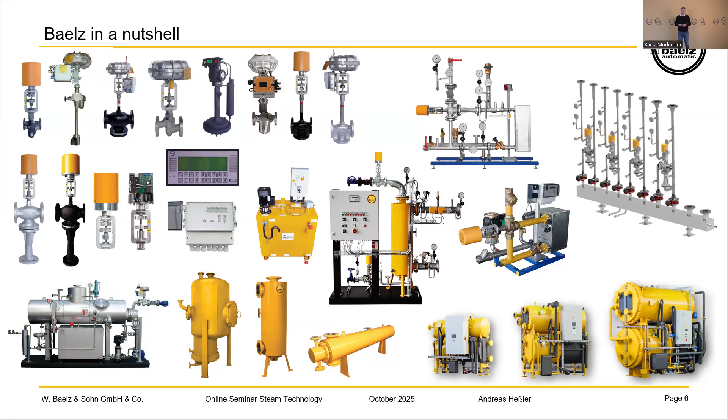Without showing the whole complete portfolio, just to give you an overview of what we are capable of doing. We are manufacturers of control valves, as you see in the top left corner.

Then the system solutions, especially for heat transfer, steam terminals, where you transform steam to condensate and use the energy of the steam to heat your process or heating purpose. We have steam generators and steam terminals, where we use thermal oil or also steam to produce clean steam, for example.

Then we have system solutions for heating distributions, where we produce whole systems of heating distributors with control valves, with injection valves. And as I mentioned, the absorption chillers in three different sizes: the Bee, the Bumblebee, and the Hornet in the bottom right corner.

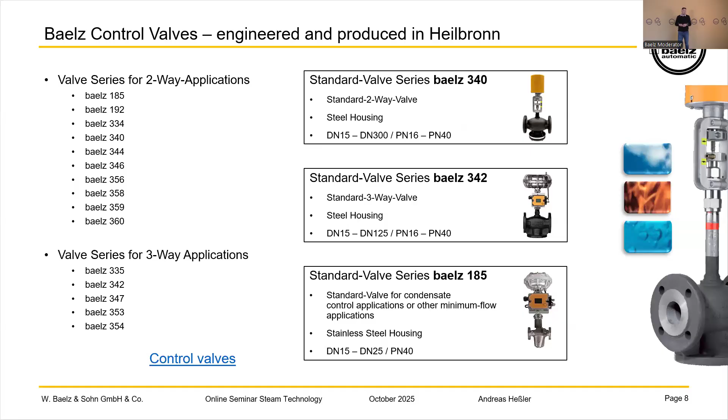And as I said, all these components add up to system solutions, for example for heat transfer, for steam, for thermal oil, for any other heat transfer application.

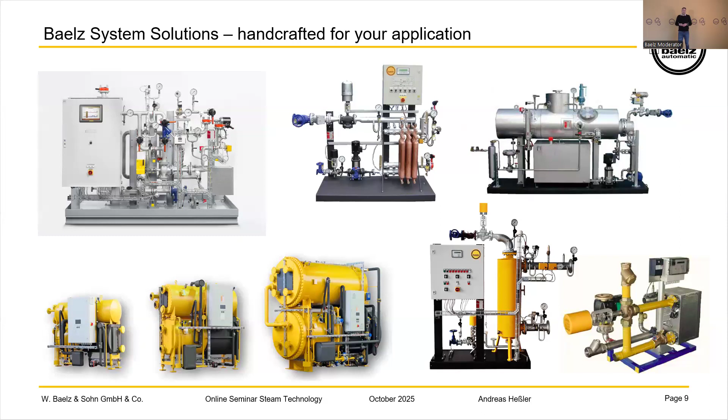If you would like to see some of these system solutions or products live, you're always welcome to Heilbronn, to our headquarters. Just step by, give us a quick call up front or write us an email, and we are happy to welcome you in our showroom, give you a little tour, show you our system solutions for steam, thermal oil, or any other heating or heat transfer application.

Just reach out to us if there's maybe a day that you already know where you will be in the Heilbronn area, then step by and we can give you a quick tour.

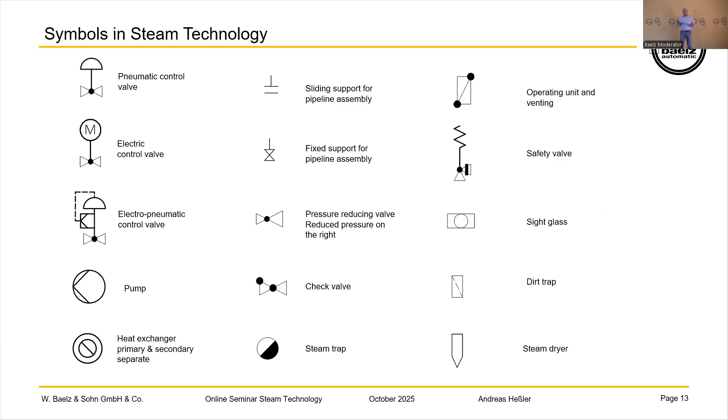The first slide, what I tried to show you, is just a quick overview about the symbols in steam technology that are used most of the time, like check valves, pumps, and so on. It's just for your information, you can read it later when you have the presentation.

Let's go first to the enthalpy of water and steam, and let's explain how this works together. First, when you have 1 kilogram of water and you heat it up from 0 to 100 degrees, you have energy going in there of around 417.5 kilojoules. And when you heat up this water more and more in that atmosphere, you will evaporate the water, and you have another energy you would put into the steam of around 2,258 kilojoules.

If we look at these two pictures, the left one, when we heat up the water to 100 degrees, we call it sensible heat. And if you evaporate the steam, we call this latent heat. Together, when we heat up from 0 degrees to 100 degrees and then evaporate, we have around 2,675 kilojoules.

Yeah, it's just... Let's go quick. That was quick, I know. Let me just interrupt you for a second because I think this is a very central slide, a very important point. If you could just go back to the slide.

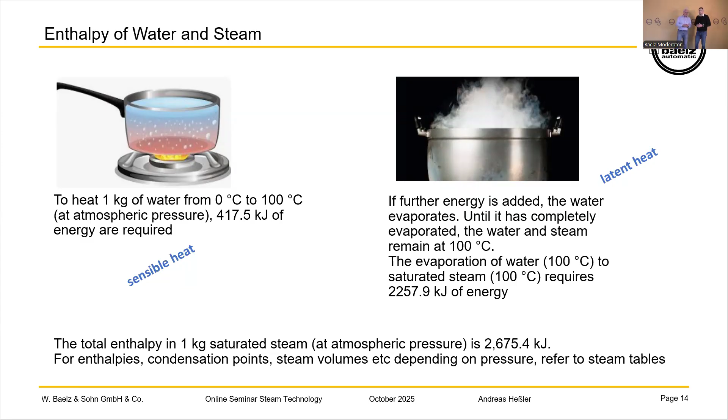Let's see the next slide and have a look at saturated steam and different kinds of pressure. When you have 1 bar saturated steam, you have roughly, together with heating up to 100 degrees and evaporating, about 2,680 kilojoules. When you have 10 bars, it's much more, but the increase of energy is mostly in heating up the water, because you need more energy to go up to 180 degrees to evaporate the water.

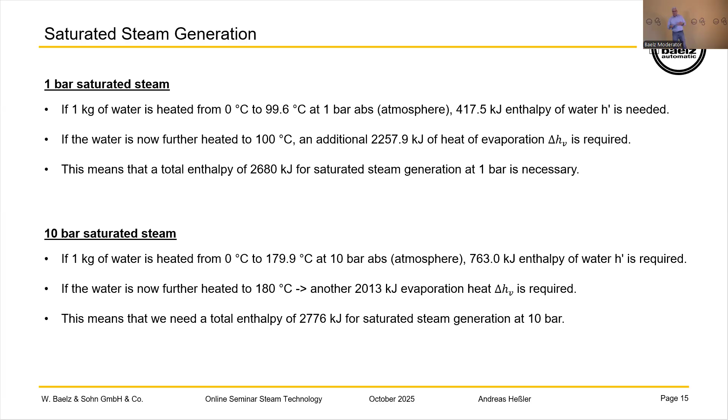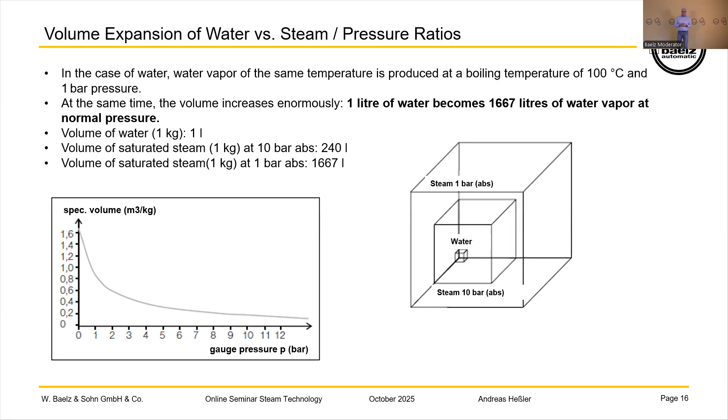We have 3 types of steam. The first one would be saturated steam, meaning it's normally very dry. When you've evaporated the water, you call it saturated steam temperature, and then you're right on the phase change from water to steam.

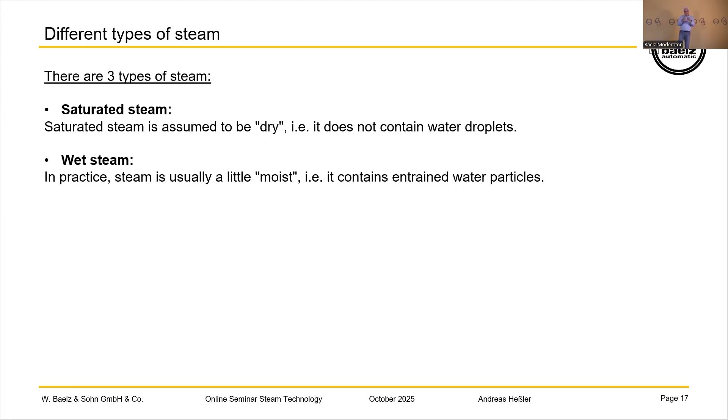The next one would be wet steam. This is the steam you see, for example, when cooking water and you see a fog over the water bubbles. We call that wet steam because it's not dry steam, there's some water in there. It's also at saturated steam temperature, but this steam is wet because there are water droplets in it.

The other one would be superheated steam, meaning you have the steam evaporated and then you give more energy, so it becomes very dry with no water droplets in it -- we call that superheated steam.

No problem, not to interrupt you, but I think it's helpful for our audience. Of course, so forgive me if I interrupt you. You're welcome. You introduced the three types of steam.

Which one do we want for our heat transfer applications? For heat transfer application, normally you need saturated steam temperature, because that's where the steam gives the most energy, to the phase change. When you have superheated steam at higher degrees, you first need a lot of area to cool down the steam to saturation temperature, so you want to have nearly saturated steam temperature. So again, the most energy is transferred by the change of steam getting into water, condensing, and in the other way, the most energy you have to put in is from getting water to steam.

All right, Andreas, thank you. You're welcome.

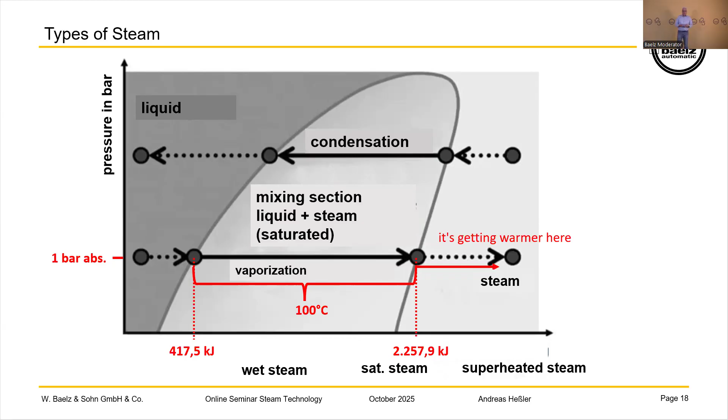Let's say something about steam valves, or let's say steam armatures.

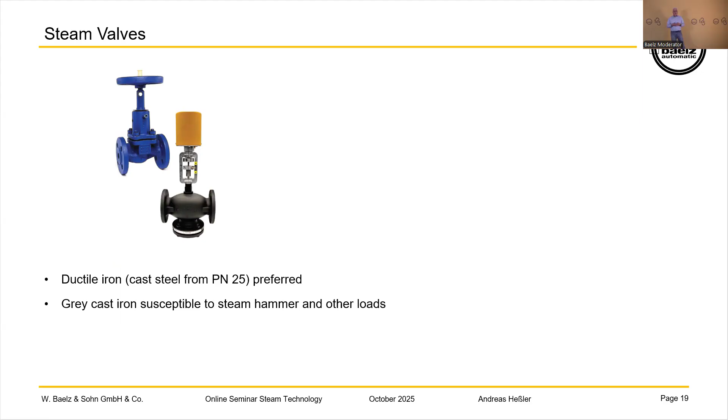For us, it's very important when you use a steam application to use ductile iron or cast steel for the valves, because gray cast iron is very brittle, and brittle means you have a lot of problems when you have some steam pressure drops or something like that. They can break, and they are not as soft as ductile iron or cast steel.

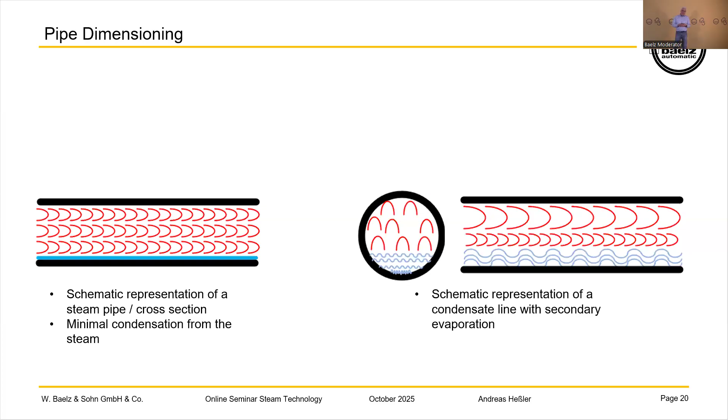You see when we have flashing or a lot of high water influence in there, mostly when you have a pressure reduction of hot steam condensate to a lower pressure, then you have a steam water mixture inside the pipe. So this is much more critical for the steam pipe than the normal condensate.

Velocities in the steam pipe: what we normally prefer for saturated steam, because in saturated steam there could be some water droplets, would be between 20 and 30 meters per second. And if you go much lower on the saturated steam velocity, you have more condensate because you are so slow with the speed. So it would be good to have them between 20 and 30 or 35 meters per second. So try to have this velocity.

For superheated steam, the velocity could be much higher because we have no water in the pipe. So we're going up to 45, sometimes to 50 or 60 meters per second, because you have no issues with water droplets or condensate inside the pipe. So it would be good for the piping.

If you have hot condensate where there could be some steam inside the piping, it would be good to have not more than 0.5 meters per second or 1 meter per second. Don't go higher, because you have some flashing, like in the right pictures. A steam water mixture is not good; the piping would be destroyed.

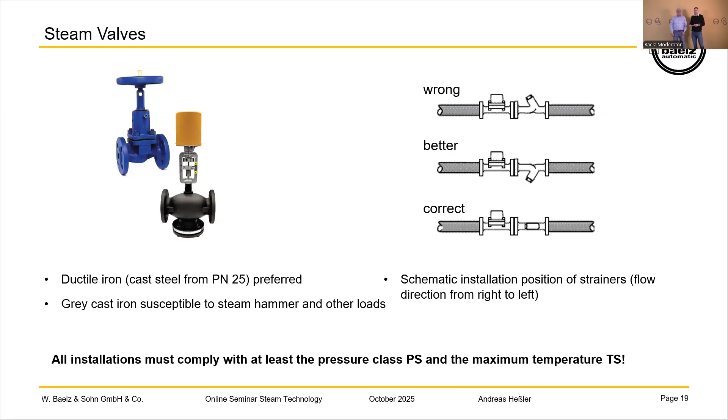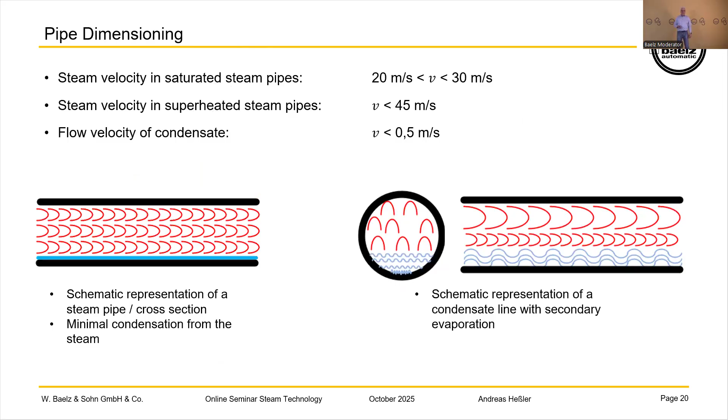So where we are, where we are, yeah. So we were almost finished with them.

Here are some slides. The next 3 slides are just for your information on what you have to check to install steam traps and how to install steam traps. Always have line falling. When you have line falling, the steam trap has to be on the lowest point, of course. The water will go to the lowest point. And the falling should be 1 to 200.

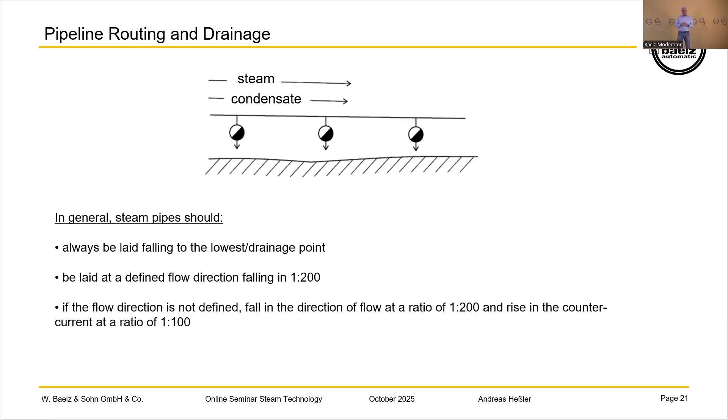And if not, if the flow direction is not defined, you better use it a little bit smaller for mounting the condensate steam traps. Sorry. Note for steam traps, when we have a lot of water inside the steam, I already told you not to have a steam velocity over 20 meters per second.

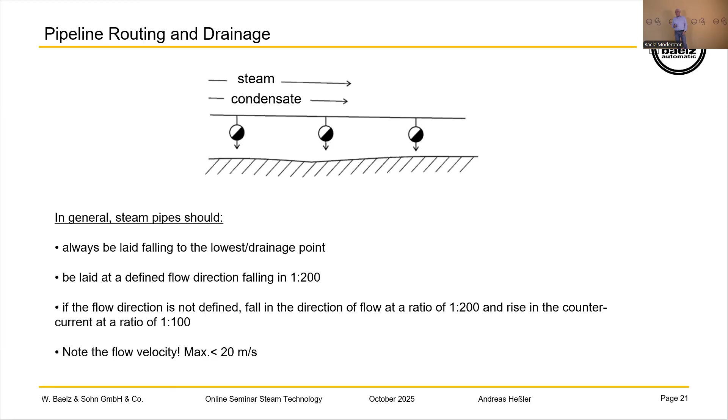I see another question, so I will stay with this slide. No, no, wait a minute. Additional information. Another, give it back. Another information. There was okay. The question was not finished. Understand. Go ahead. Yeah, and we will go back.

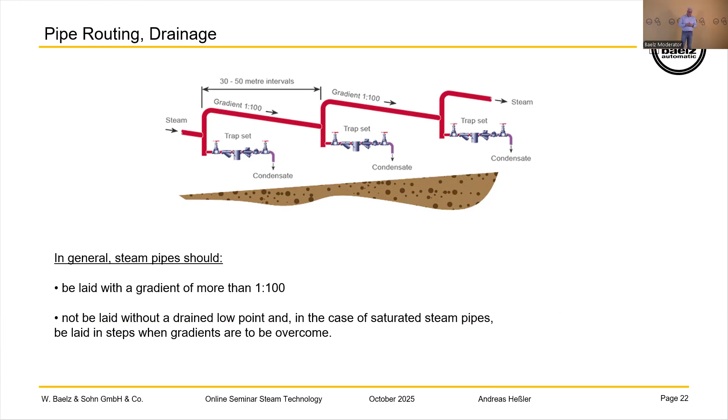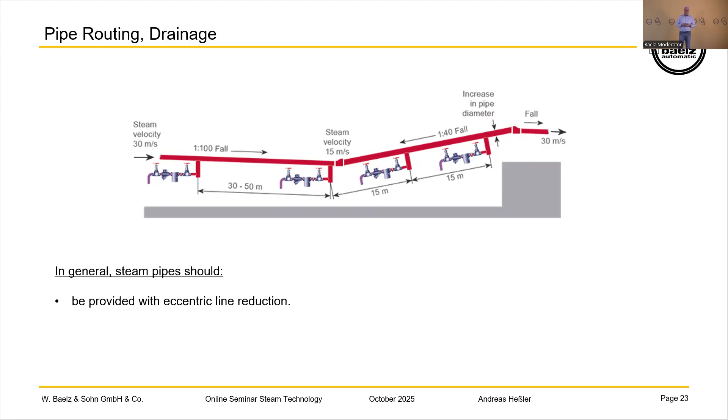If you have a line with more than 1 to 100, the installation should be like shown in the picture, making a lowest point and draining it there. And here I have another picture when we have some ups and downs and how they fall. So it would be good, when you fall down, that the installation of the steam trap would be less than 30 to 50 meters. And also what is very important is to use eccentric line reduction and not concentric.

Yeah, that's what the slide says. You can check it later to have it exactly. It's good information for you.

Another question, you have to go back? Ready or not? Yeah. There was a question about safety valves. What about the PSV relief line velocities? So, I understood the question is about the media velocity after the safety valve, when the safety valve is active.

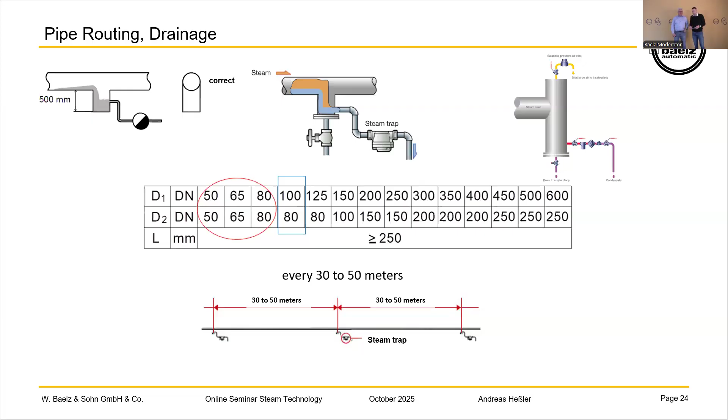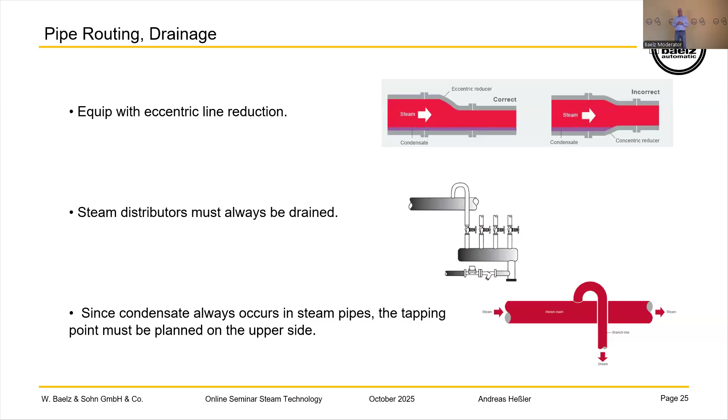Steam distributors must always be drained, that's for sure. And the next one is when you have water inside the steam and you want to tap off steam: the tapping point on the steam pipe always has to be on the top, because then you can be sure that you don't take the water with the steam.

Next question. Oh, that's very interesting. A lot of questions. I'm so bad, or no, I think it's so interesting. It's an interesting topic you're talking about, of course. Yeah. Yes, we appreciate all your questions. Of course, yes. Go ahead with them.

Yes. There was a follow-up question to the 100 meters per second of the safety valve topic. The 100 meters per second at which pressure? At set pressure or atmospheric pressure? Normally the safety valve goes to atmosphere, and that means at atmospheric pressure, what is going out of the safety valve. Yeah, typically the line goes to the side of the building. Yeah, and to a silencer in the normal case.

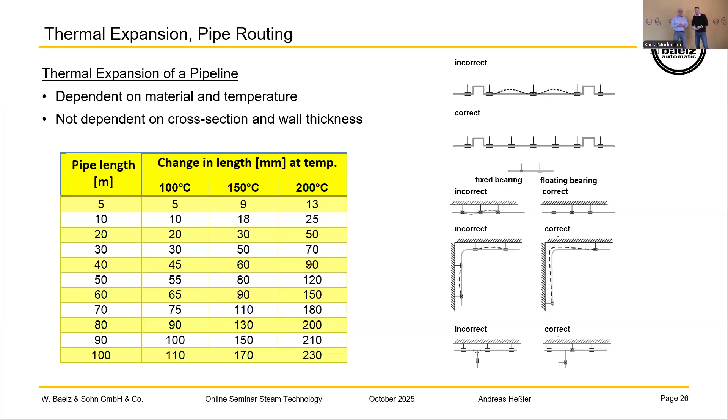Here I made just for you a practical rule of thumb, just an overview for whoever is interested. You can read down a little bit and get some information. That's just some rules to quickly know what is what. And yeah, it's just information, and you can check this out.

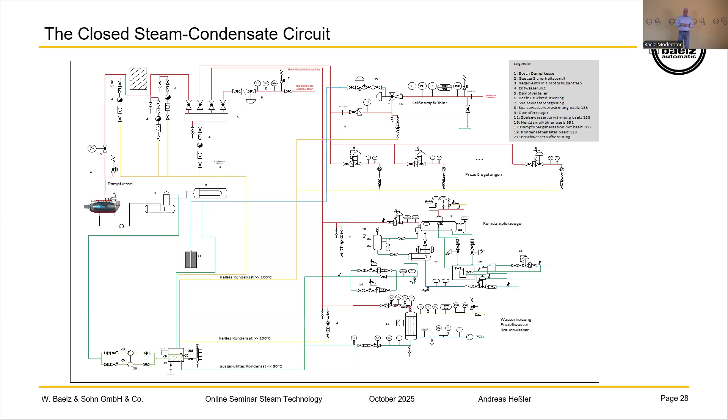On the next one, what we see here is a schematic of a closed steam condensate circuit. On this one I want to show you where we are. I chose this because a closed condensate circuit is very normal for BAELZ. For example, we're starting here with the water heating, process water and raw water heating, using our heat exchangers. The next one would be our clean steam generators used in this circuit.

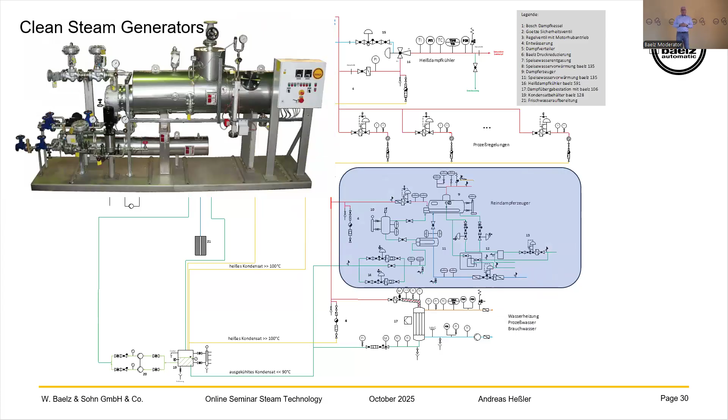And then, of course, you need some control valves in this circuit. We have the regulators for them. We have different kinds of actuators, like Michael already told you. So you can use all of our control valves with the controlling and measuring. The next would be steam conditioning. We have our 591 steam conditioning valve. I will say a little bit more about steam conditioning later on, so you will see more information then.

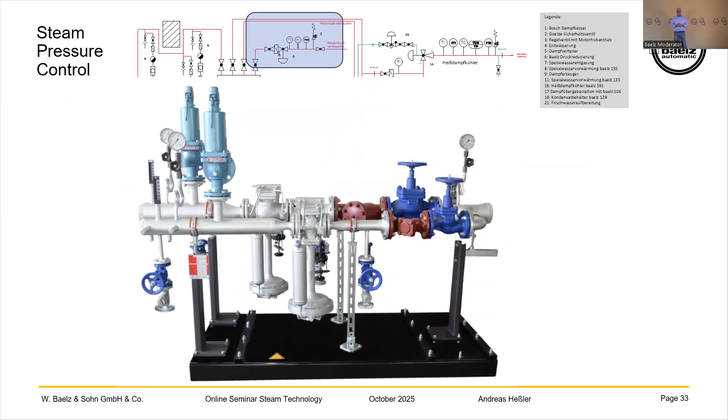And then we have normal steam pressure control, in this case with our self-operating valve. It could also be done with a normal control valve. And for the condensate handling, you need some instruments and systems we can also deliver. You see, we are all around the complete circuit, and when you go out on the steam side and have the water heating, the chiller, the divider, we can deliver all the other parts on this secondary side also.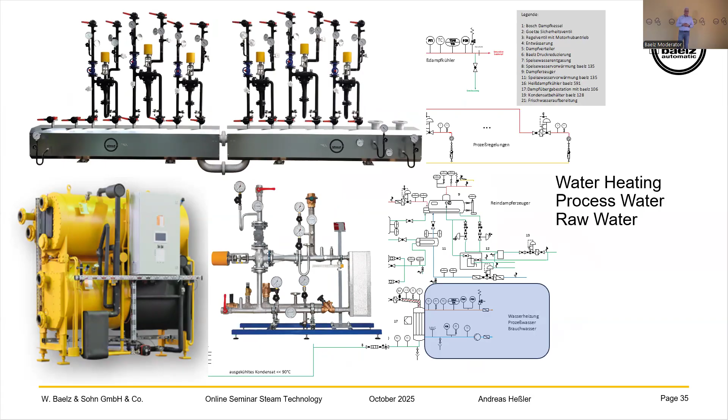Let's say something about steam transfer stations, what kind of design data we need. First we need the use case, what you need it for. Then we need the primary and secondary media, like steam or water. The design temperatures and pressures, the maximum operating temperatures and pressures handled on the heat exchangers, technical connections and conditions, and type and design of the control, meaning whether you want steam side control or condensate control. I will show you the difference now.

On the left picture, you see the steam side control, which means you need a control valve at the steam inlet to control the temperature on the secondary side. And with condensate control, you're not controlling the steam, you're controlling the condensate, where you control the outlet temperature on the secondary side.

Of course, not with a question, but just to make it clear, because I think this is also a very interesting slide that you just showed. The steam side and the condensate side control. So we're making a difference between two types of controlling the power that the steam terminal provides to the secondary side. On the steam side control, we control the amount of steam getting into the heat exchanger by a control valve on the steam side.

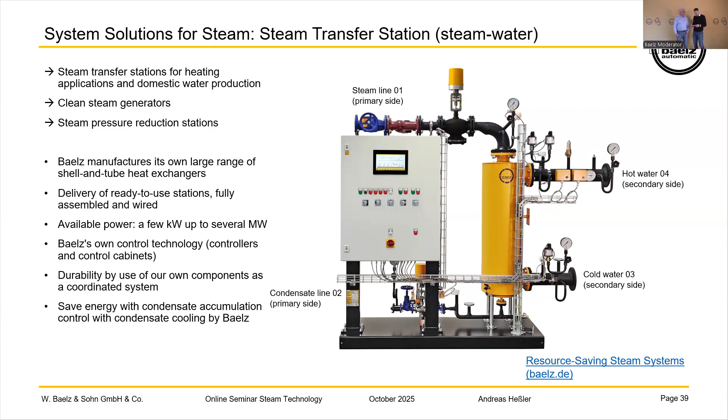You're welcome, Andreas. Here is just a picture of how a compact unit looks. You see the inlet and the outlet connections, just for your information.

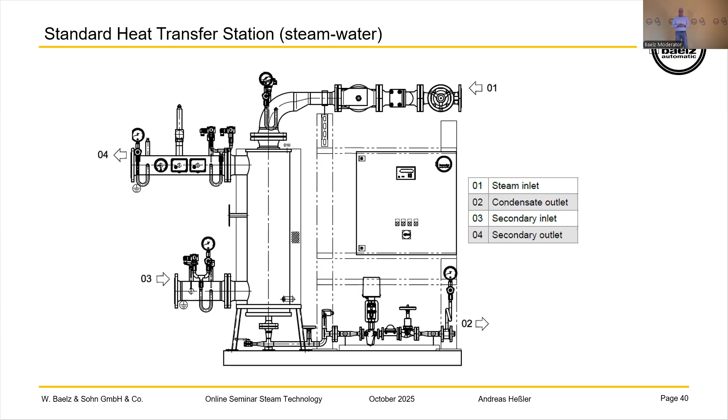The next one would be clean steam generators, where we put in plant steam, thermal oil, hot water or electrical heating, and with the feed water, normally demineralized or clear water, we produce pure steam. This design can be horizontal or vertical, and the output, like the other ones, is from a few kilowatts up to several megawatts, which we can all handle.

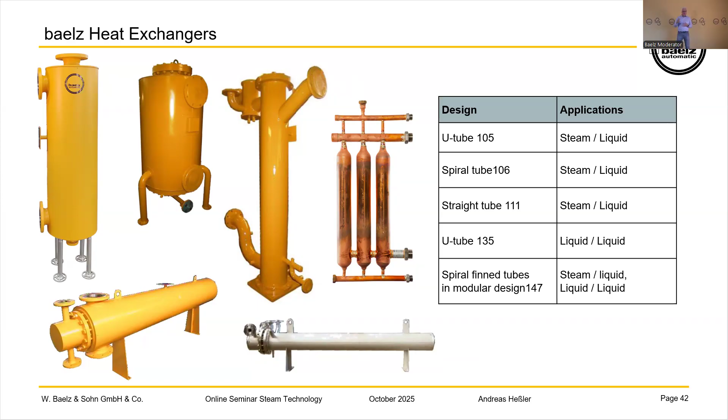Here's a quick overview of our different kinds of heat exchangers and their applications. Steam-liquid is the 105, and so on. I will now say something about the different heat exchangers. We will start with the 105. It's a horizontal heat exchanger for steam side control, vertical for condensate build-up, controlling T2 constant, individual designs possible, large and vertical and so on. The material is normal carbon steel. The tubes are made of copper.

Now I get it from the side, copper in English. Normal steel or stainless steel. We normally use as a standard the tubes with stainless steel. That's for all our heat exchangers because it's the best solution with costs and the heat exchanging. We can build this also in a full design of stainless steel. The tubes are from 10 to 12 and a little bit bigger, with different kinds of wall thickness.

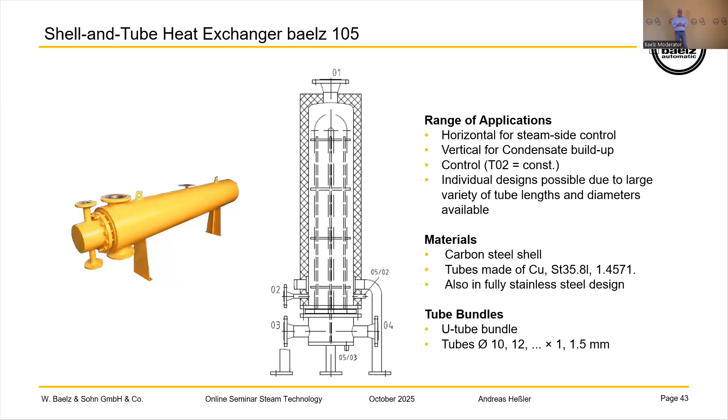Go ahead. Okay. The next one would be 106. Pretty similar to the 105, heating liquids, steam with large output range. We have accumulation from 0 to 100%, heating surfaces from 0.5 to 150 square meters. Sorry. Very compact design. The materials are the same as the 105. I already explained it to you. The tube bundle is a spiral tube bundle, made with a diameter of 10 millimeters.

The next one would be our 111. It's a version for heating water, handling process water, and condensate in upright position versions, individual design possible for large, and different kinds of lengths can be available. The materials are pretty similar to all the others. We can do this also in a stainless steel finishing. The bundles are also like the other ones, starting from 10 to 12 to a little bit bigger.

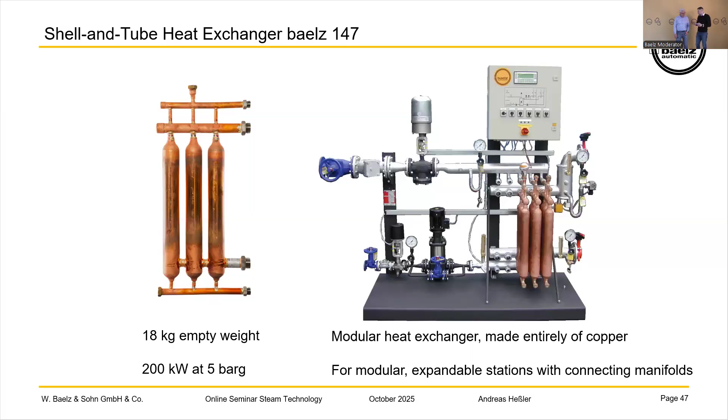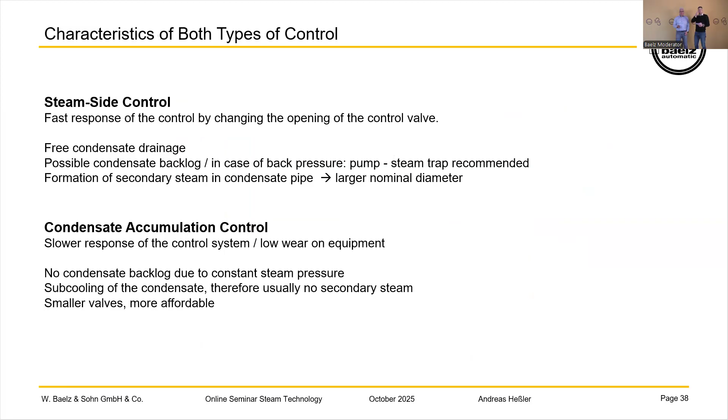Yes. Another question that has to do with the condensate side control. Maybe you go a few slides back if that's not too complicated, so that we see it here, for example. Yeah, this one would be perfect. The question is, is it best practice to install a steam trap in series with the control valve? No. It isn't? No, it's not possible.

When you're mounting a steam trap, you see on the left side, then you make a steam side control. Because when you're using a steam trap, you always have no condensate inside the heat exchanger. So you're not controlling anything. It means you always have 100% power of the heat exchanger, and it simply is not necessary. When you have a control valve on your condensate side control, there will always be only condensate. There's no pressure because there's a layer where there's the difference, the Übergang.

In English? Transition. The transition. Yeah, good. Thank you. Thanks from the technical boys here in the background.

Yeah, there's the transition from steam to condensate, and there will be no steam in the condensate line at the condensate side control. No, it's not needed. And also we have some temperature sensors to check the temperature of the condensate to say, oh no, the temperature is too high, we have some steam. So there is no issue. All right. Thank you.

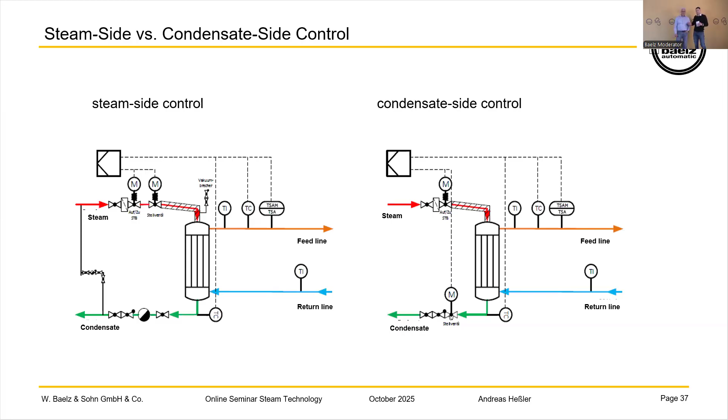Go ahead. Go forward. A few slides forward. Where we are.

Condensate handling. We have a compact unit for condensate handling in different kinds of sizes. The next one, which is a very important theme, is when you have hot condensate and you want to put it in a cold condensate, meaning hot condensate with maybe also a little bit of steam inside.

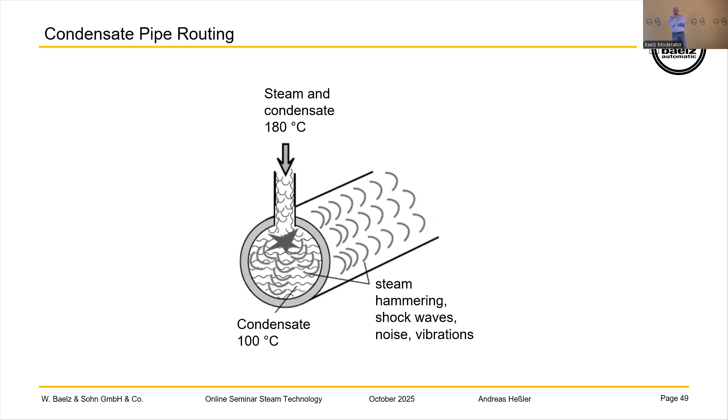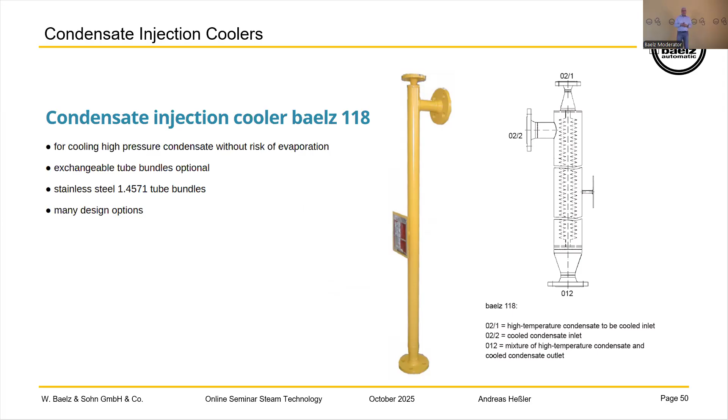That's very critical because you have hammering, shock waves, noise and vibrations. For this solution, we have our condensate injection cooler BAELZ 118. As you will see on the next slide, it's much better. The hot steam comes from the right side inside the pipe, almost like a heat exchanger with open pipes. The hot steam condensate goes into the pipes and cools down by the cold condensate, while the cold condensate heats up. So the temperature difference isn't so big. You get a mixture of hot and cold condensate without hammering, without noise. It's a very good solution when you have to put hot condensate into cold condensate.

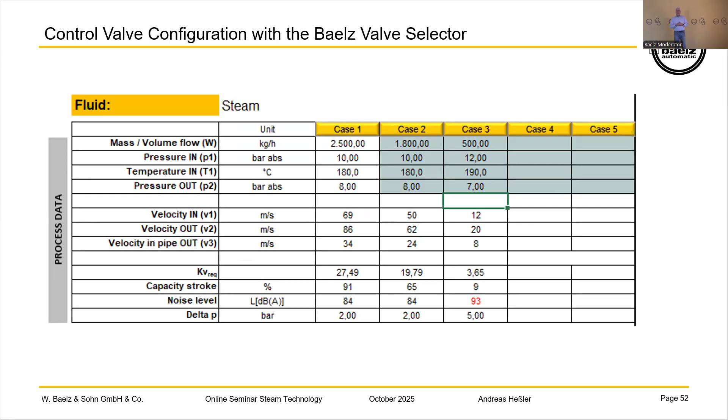Let's say something about the control valve configuration. For this we have our BAELZ valve selector, where we can choose the correct KVS values and the correct size with the velocities, and offer that to you.

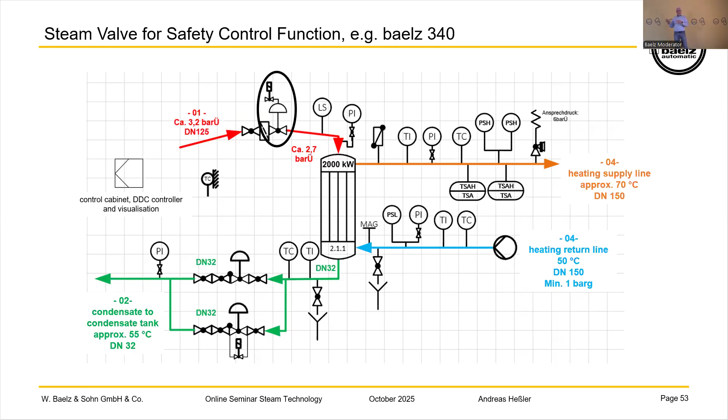Here we have a steam valve for safety function. You see on top, when we use a steam valve for safety function, it means quick close on over temperature or over pressure on the secondary side. We can use our valve 340. We have this kind of valve, as Michael already said, in standard two-way control valves with different sizes from DN15 to DN300, different pressures. We can do it in cast iron, ductile iron, or stainless steel with balanced plugs for smaller actuators. So it's possible in different kinds of applications or versions.

The next one would be- sorry to interrupt, Andreas. Going back one slide, just to make clear so there's no confusion about the control valve shown here: you have a three-way valve shown here for the two-way version, the BAELZ 340, as it's used as a safety valve or safety control valve. On a steam terminal there would be a blind flange on the third way. So that's the difference between the two-way and three-way valve. They have the same housing, which makes more standardization, but you just use a blind flange to close the third way. You can also use it as a mixing valve, with or without the blind flange.

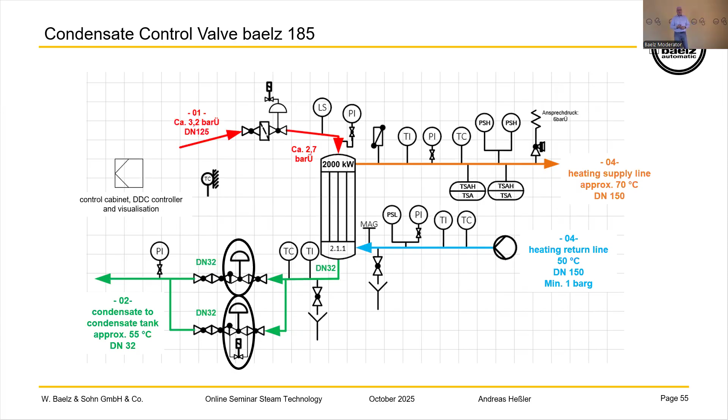Let's go now to condensate control valves. This is normally our DN15 valve from our 185 valve line. If the size- because I'll show you on the next page- we have the 185, a compact design with small KVS values, as Michael said. We can do some custom valve plugs. This has a stainless steel body and is only available in DN15, PN16 to PN40. It's necessary when we have more condensate and more velocity inside the condensate on the heat exchanger than when using our control valve 340. It's not limited; we have some special applications. We can mount strainers and shut-off valves inside the 185 valve. And if we put our element, the 206R, on it, we can use this also as a self-operating control valve.

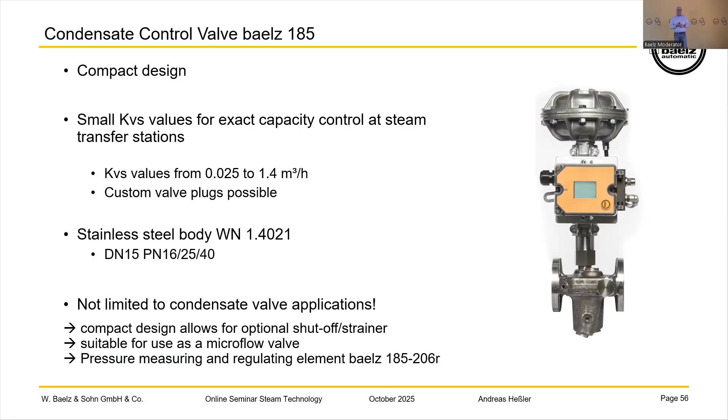Good. Coming from the audience has to do with the steam valve, the 340, when we use it for condensate side control. How would the steam valve ensure the safety function?

Normally with springs. If you're using a pneumatic actuator, it's very simple because in the pneumatic diaphragm actuator you have normally springs on it, and when there's a fail of the air, the springs will close it, or you put it on the underside. You can open the valve also, but in a safety valve you want to close it. So this safety function is already included.

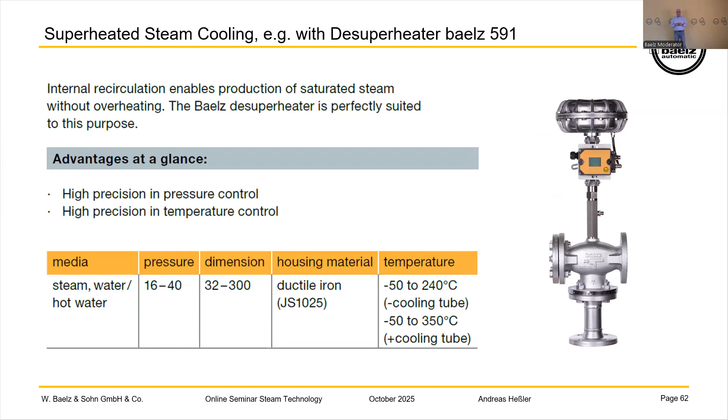Here's just a quick overview of what kind of sizes and how we do it in the normal case.

Another solution from our side about steam water application is our thermocompressor, BAELZ 590, used for recirculation. Like the word already says, recirculation - we have one circle where we can increase the outlet pressure, or the pressure we have after the condensate flashing.

And another one, when we have an open steam vessel, we have some other condensate coming in to increase the flash steam to a higher pressure level.

The flash steam will be increased with the motive steam to a middle pressure steam, and this can be used for our heat exchanger. So we really use the heat that you're normally losing over the flashing of the steam, which normally goes over the roof.

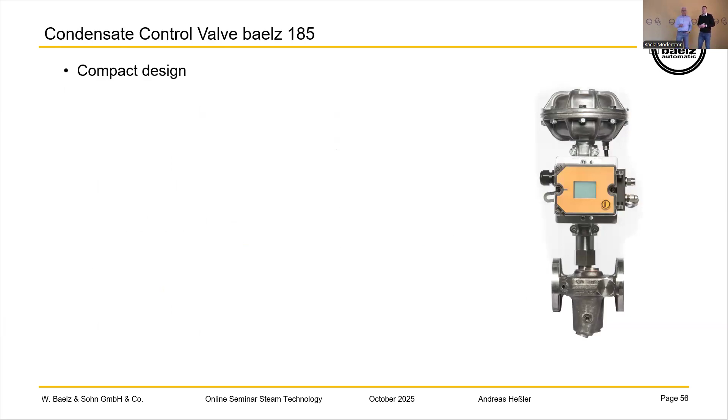I think we'd take this question and give some time to get a little more into detail. One thing that comes to mind to avoid water and steam hammering, meaning condensate and steam coming together, is to use steam traps, as we already discussed with the 118.

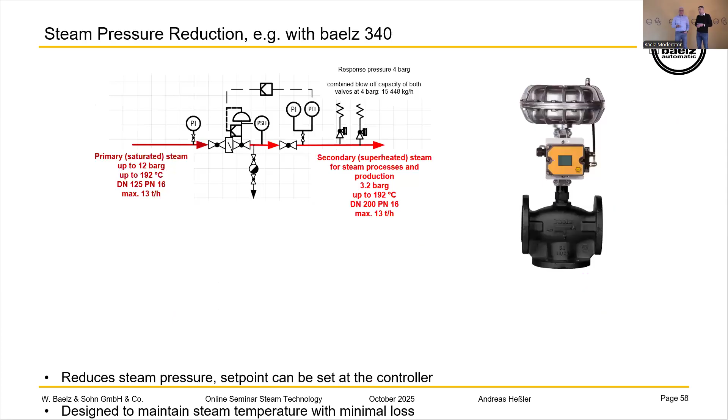It depends on your system, what type of steam hammering you're talking about. Steam hammering typically appears when condensate and steam come together, and the steam takes the condensate with it, making it steam again, and then the steam becomes condensate quickly. This is what causes the steam hammering.

You can avoid it by, for example, mounting the strainer horizontally. There's a lot of different ways depending on what kind of system you mean and how - for example when you talk about spraying into the steam.

That I'll explain later for the 591 - there is no hammering there. But if you have more questions, you can contact me and we can talk about it in more detail. No problem.

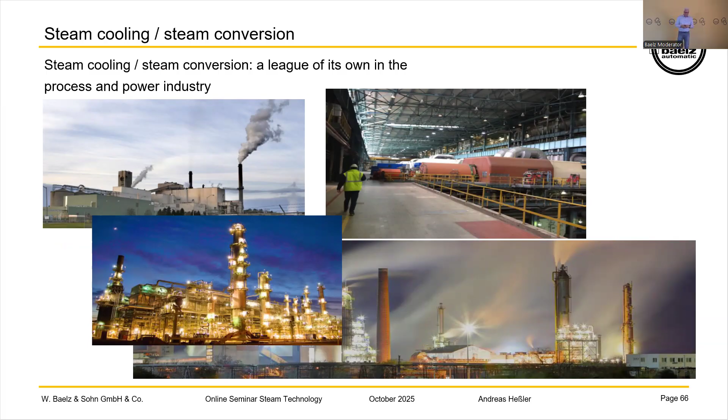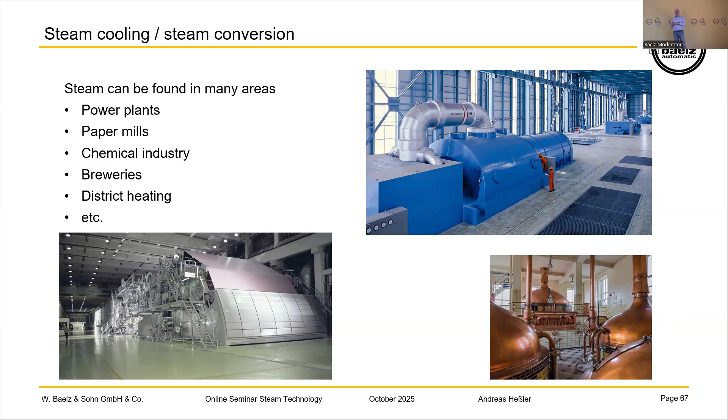Now I want to close this area on heat and steam, and talk about steam conditioning - conditioning in terms of temperature and pressure, and the techniques to cool down and reduce steam. Where is this needed? This is needed everywhere - power plants, paper mills, chemical industry, breweries - all of them need specially conditioned steam. We start first with steam cooling, how we can cool the steam.

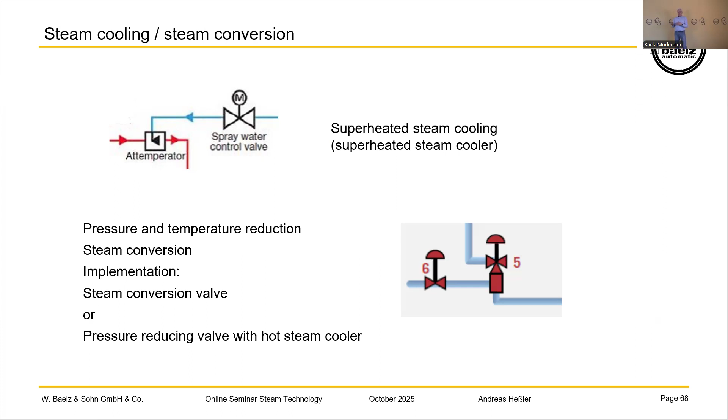We have two approaches. We can just spray water in to cool down the steam. The next option is using a steam converting valve, which reduces the steam pressure and cools it down by spraying water inside the steam. You can also do it like a pressure reducing valve and install a desuperheater or something afterward where you spray water into the steam.

Steam cooling technologies. What we can do is a fixed nozzle in two different ways. Here we see it as a ring, or just spray it over inside of the steam. The next we can do is a fixed nozzle with an integrated control, so you don't have to use an extra control valve for controlling the water flow.

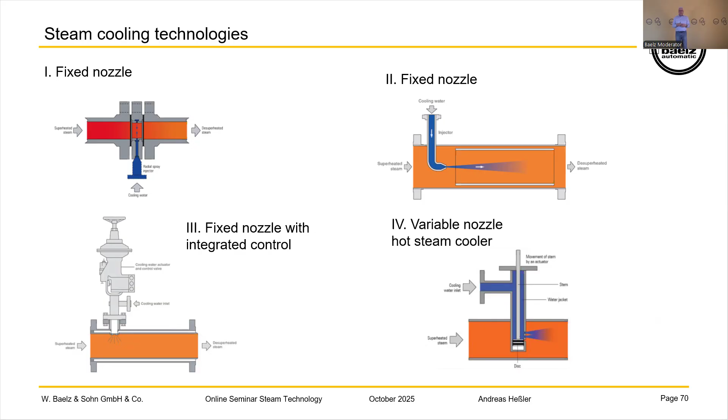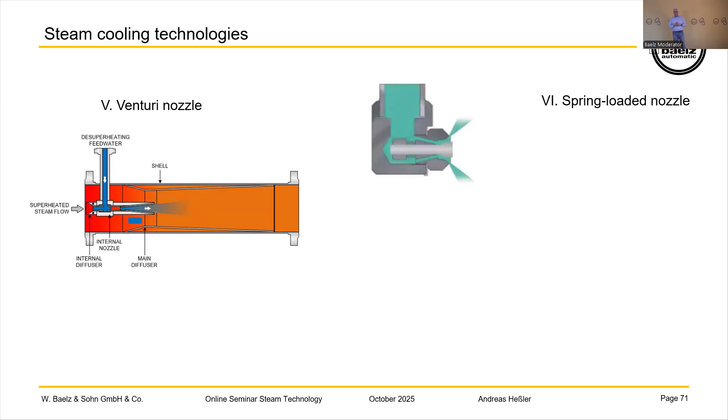The next one would be a variable nozzle, meaning we have different kinds of nozzles with different Kvs that we open and close. Another technology would be a Venturi nozzle, and a spring-loaded nozzle would also be a technology. And last but not least, a motive steam cooler, meaning this one uses motive steam to vaporize the water droplets, make them very fine. I just want to explain the different kinds of cooling systems and what they are doing.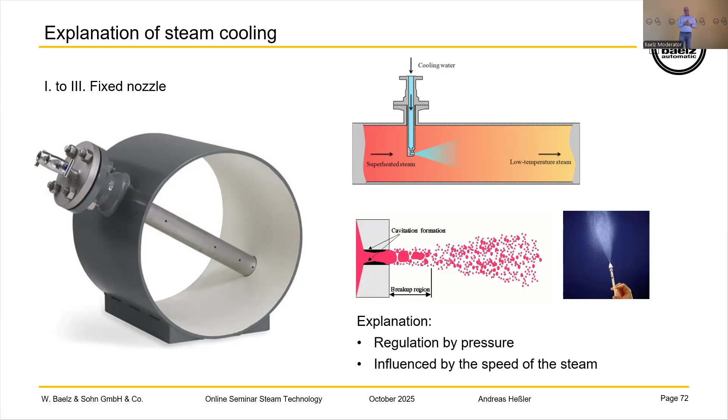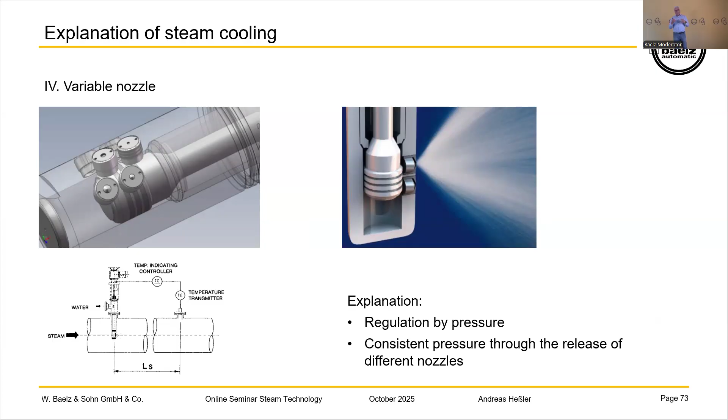First, we have the fixed nozzles. The fixed nozzles are regulated by pressure. Lower pressure means lower mass flow, and also bigger water droplets. Higher pressure means more water flow and smaller droplets to cool down the steam. The next one would be the variable nozzle. As I already told you, it's also over pressure, but in this case we have different kinds of nozzles with different Kvs, so we can open and close. So the nozzles always work with the highest pressure drop and with the best spraying picture.

The Venturi nozzle works with the Venturi principle. It's also over pressure, of course, but in this case we're using the higher increase of the velocity of the steam for atomization of the water droplets. And the last one is the motive steam cooler. As I already told you, it's very fine atomization because we're using the high pressure steam to vaporize the water.

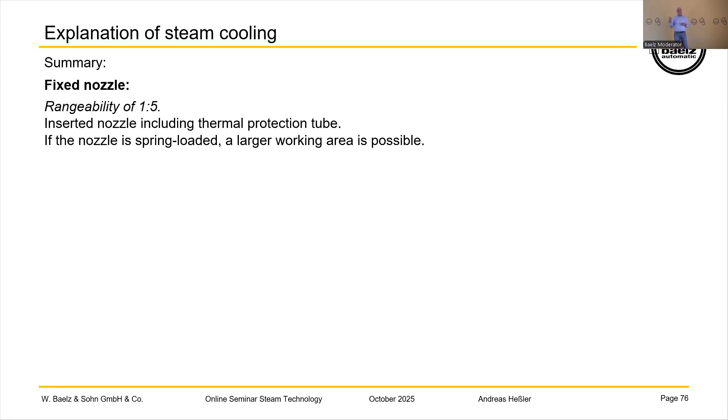Just as a summary: fixed nozzles. Rangeability or turndown ratio, it's the same. We have here a turndown ratio or rangeability of 1 to 5. It's also normally needed a thermal tube to protect the piping because the water droplets are very big. And with a spring-loaded nozzle, the rangeability would be a little bit higher.

The next system would be the Venturi system. We have here a rangeability of 1 to 10. It's okay for good temperature control. The Venturi nozzle creates additional turbulences, and as an effect, they cool down the steam much better than just a normal spray nozzle.

And the biggest one, or the best one, is the motive steam cooler. We have a rangeability of the water of 1 to 50. Here we have the motive steam to vaporize the water, and at the outlet we have more like a fog instead of water droplets. So we have much more area where the steam can go through the water and vaporize it. So we have a very small distance to the temperature sensor, and we can cool down very close to the saturated steam temperature.

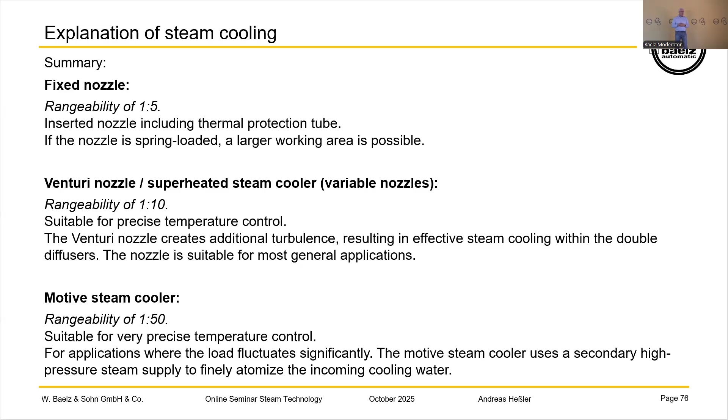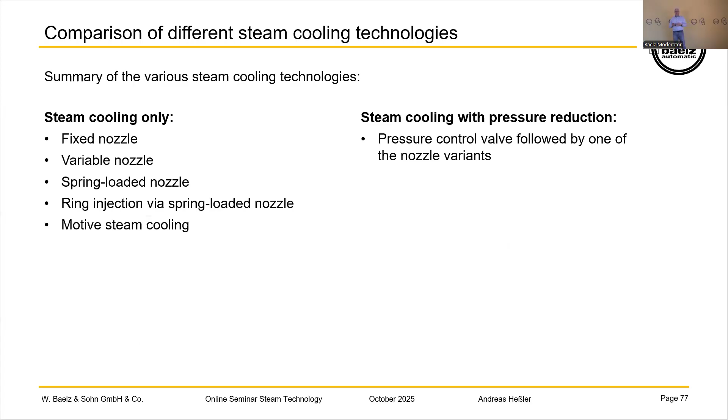Here's just a quick overview. When you have steam cooling only, you can use a fixed nozzle, variable nozzle, spring-loaded nozzle, ring injection via spring-loaded nozzle, or motive steam cooling. If you have cooling with pressure reduction, we have a pressure control valve followed by a nozzle system on the left side. You can have a steam converting valve with seat injection, a steam converting valve with ring injection, or a steam converting valve with a motive steam head.

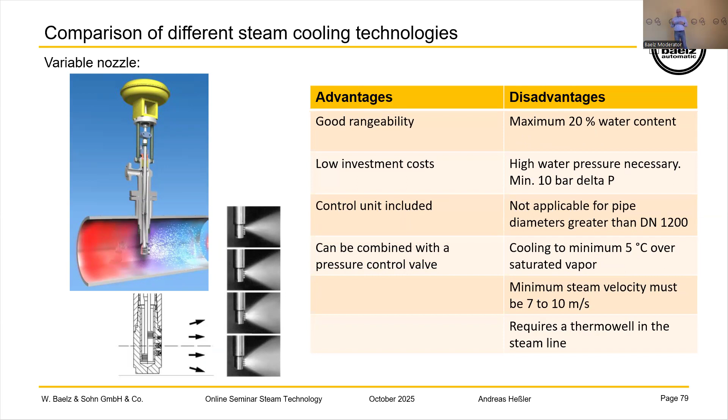Here I just want to show you the disadvantages and advantages. You can check this later in this presentation. You will see that the different kinds of systems have different advantages and different disadvantages. The same for the variable nozzle, what their limits are, and for the motive steam, the same.

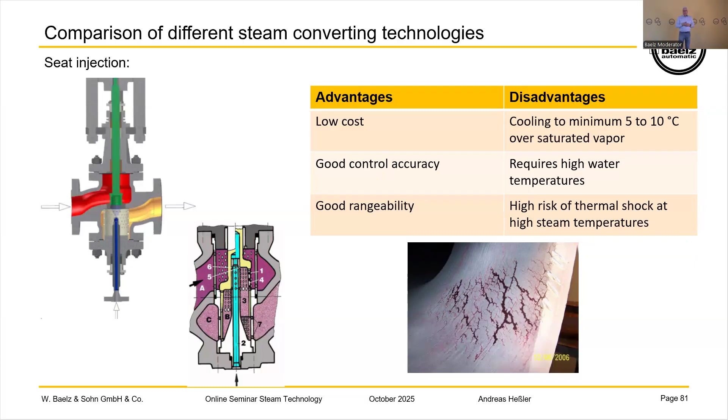And here I just want to show you real quick what you can read later, the disadvantages and advantages of the different kinds of steam converting valves, in this case ring and seat injection. The big disadvantage of seat injection is that you may have a high risk of thermal shock inside the valve. Then we have the ring, or the pressure reduction with cooling after the valve. Here the big advantage is that the spraying is out of the valve, so we have no destruction inside the valve.

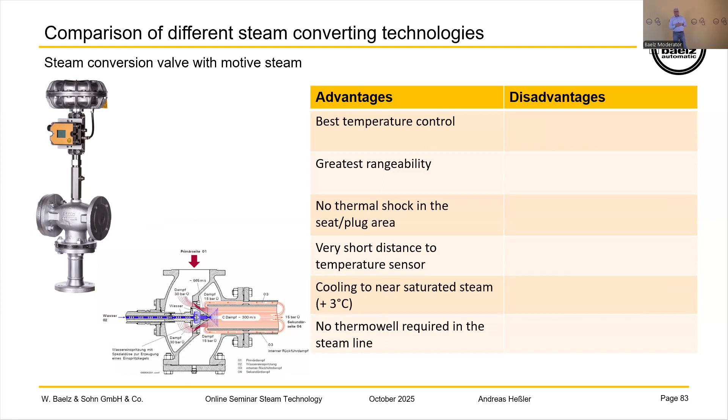The next one would be our motive steam head. You can see there are only advantages, no disadvantages. This is a high-class cooling system where you can cool down really near saturated steam temperature.

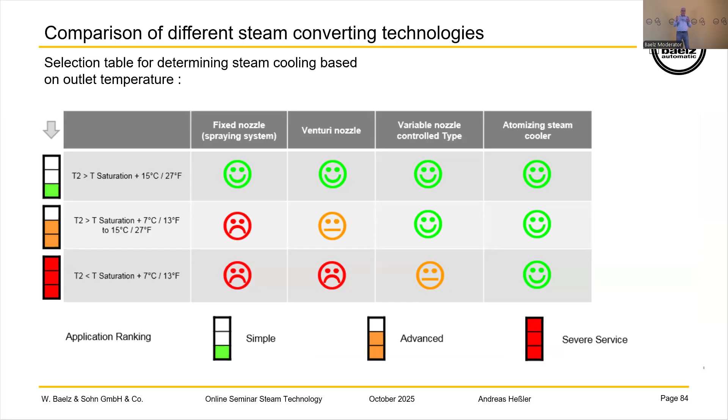I made some tables real quick with when you use what, so you can have this and check it later when you have this presentation. It's very simple with the smileys. When you know what you want to do, you can use these two kinds of tables.

And last but not least, I just want to say real quick something about our steam converting valve 591, just for the advantage, what we're doing with them. You see on this picture, we have here two different kinds of cooling systems. We're using the motive steam head and also, in case of the protection pipe we install, the Venturi system. So we have a very, very good ratio. We can go near saturated steam temperature and a very, very low distance to the temperature sensor.

From my side, I will be finished. It's getting a little bit longer than I thought, but you ask a lot of questions, and that's great. Thank you. That's good. That's just the next question. Just pick it up, Andreas.

Thank you. I also collected a few questions to ask, so that it's not getting too boring for you just doing your presentation. We're staying at the steam cooling, for example, done by our BAELZ 591. The question is, at what distance from the injection point do you advise to measure the required temperature?

Depends on what kind of cooling system you use. For motive steam systems, some say half a distance of the steam pipe. That's what I've heard a lot of times. This is not correct. You have to check how much water you put in and what the system is. I would say in the normal case for our valve, minimum around about 3 meters. For normal injection with normal nozzles, without motive steam, I would say minimum 7 to 10 meters.

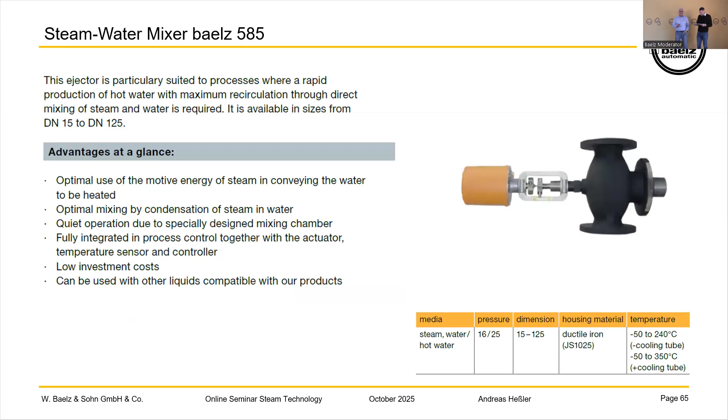Again, turn-down ratio. Which turn-down ratio can be accepted by BAELZ 590? And what is the guideline for motive steam pressure selection to low pressure steam? That's also a very good question. Depends also on the conditions. In the normal case, the ratio is not this big because you have to suck the lower pressure with the motive steam. It depends on what is important for you. Is your outlet steam important or what you want to suck? I would say 1 to 5, 1 to 10, something like that.

But also individually. When you have a higher motive steam pressure, the difference between the suction pressure and the outlet pressure is also an issue. When this one is too high, this valve will also not work. This was pretty much the second part of the question. So is there a rule of thumb for the ratio between motive steam pressure and low pressure steam, the steam you want to use for your application?

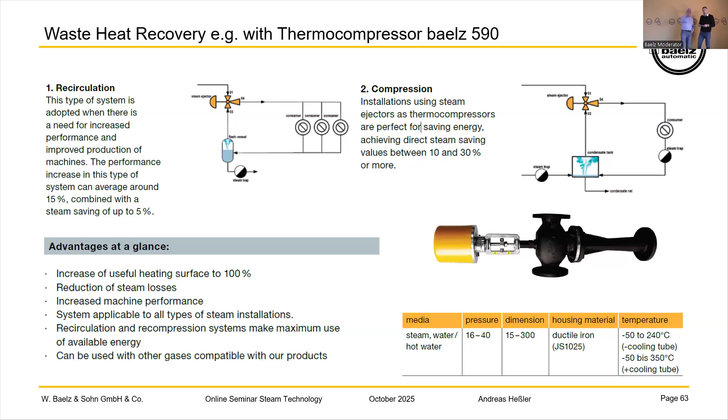Another question having to do with the BAELZ 590. Does the low pressure steam being raised in pressure by the thermocompressor need to be clean, or can we just use process steam? It has to be clean. But it's normally clean, because when you see this picture, you normally come in with the flash steam, or with the suction steam, normally from the flash vessel or from the condensate tank. So that's normally clean. If you come from process, it would be better to use a strainer or something like that.

All right, and another question. I have to read it first. Where can we apply the steam operated pumping trap, SOPT, and thermodynamic traps? So steam traps that are also additionally operated by process steam to increase the condensate. Yeah, correct.

Where can we apply it? Is there a necessity to apply it in our systems? No. Do we have to? No, normally not. But if you want to have this, we can do this also. But this is not a product from us. I mean, it can be used if you have low steam pressure or a high steam pressure loss going through your heat exchanger. But normally using pumps.

Normally, because you have to pay a lot of money for steam, and you don't want to use it just to put your condensate back up to the pressure, you're using condensate pumps. They're much cheaper. Basically, in most BAELZ applications, I would say they are not necessary. And when we need it, we're using pumps. All right. Perfect.